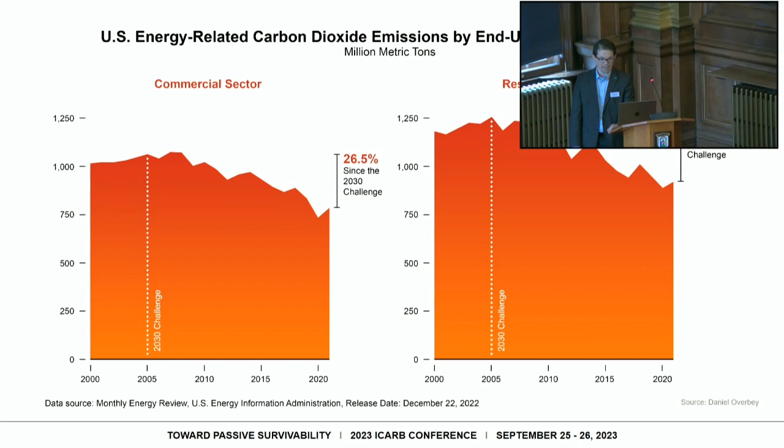How have we actually done in the States? On one hand, we've made significant cuts in both the commercial and residential sectors. But as you can see here, 26+%, it's not nearly staying on track as a collective industry. It's not deep enough, fast enough.

If we look at how the industry has done, the signatory firms that have signed up for the 2030 commitment, which is an initiative through the American Institute of Architects - this green line that you see on here, going back to 2010, when this initiative was brought forth to the architectural community - you can see what's essentially a flat line in the last 3 years.

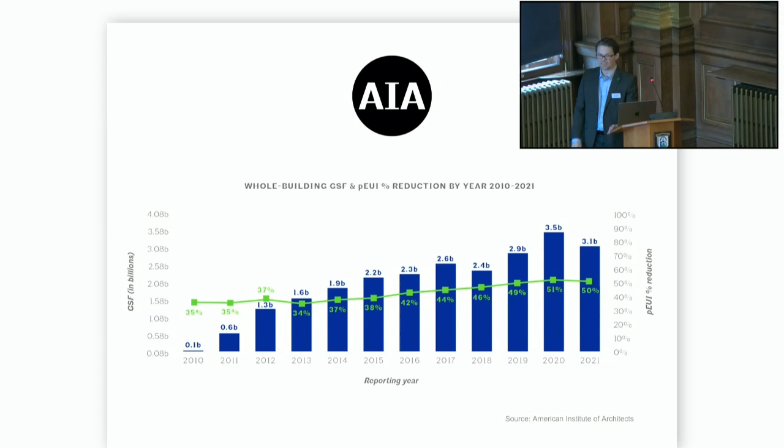You can't read that probably from your seats. That is 50%. What that means is in the last reporting cycle, we are just now, in the 2021 reporting of data, just now reaching the 50% reduction that Ed Mazria called for back in 2006. We've effectively flatlined. And this, by the way, represents the 1,000+ architecture firms that have raised their hand and said, we're going to do this and we're going to report data. This is the best of the best, and also only represents about 0.1% of the firms in the US overall.

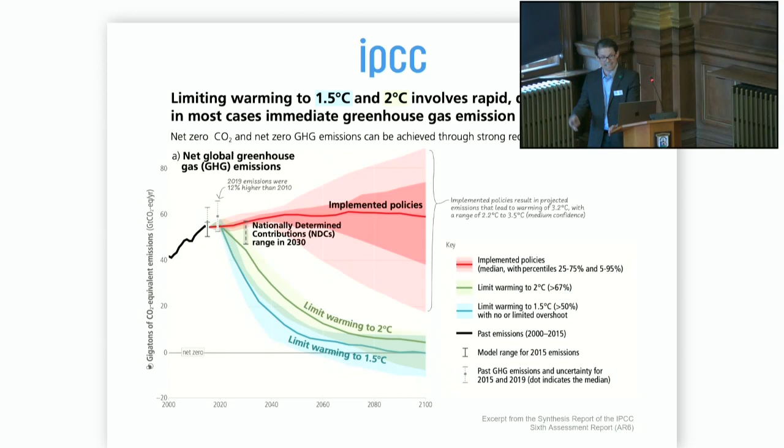So there has been and will continue to be consequences to the collective flatlining, and this is actually where Alex's story comes in. I've got the honor of sort of pinch hitting for him and telling you the story of his work in passive survivability, a concept that's been raised here in the last 2 days as well.

And that story with Alex goes back to Hurricane Katrina back in August of 2005, where thousands of residents were forced to evacuate their homes due to flooding, and moved many of them, 83,000, toward the Superdome, which is the largest dome structure in the US.

On the flight out here, I happened to watch an episode about the greatest stadiums, featuring Peyton Manning from Indiana, which is what drew me to it. It recounted the 10 greatest stadiums in the world of all time, and this was on the list, talking glowingly about what happened here.

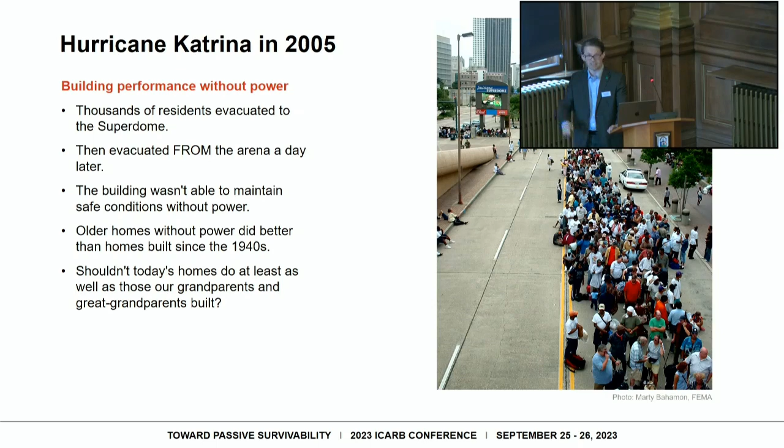Within a day, they had to evacuate people because thermally, in addition to some untoward behavior internally, temperatures reached a point that it was unsafe. So one day later, folks had to evacuate from this.

Alex and a group of 200 professionals, in an event sponsored by USGBC, assembled in Atlanta and put together a product that they used as a guide map for anticipating this phenomenon would continue to happen—the New Orleans Principles.

Within the New Orleans Principles is item number 8, passive survivability. This is the origin of that concept that Alex coined here, and you can see the verbatim language: homes, schools, public buildings, and neighborhoods should be designed and built or rebuilt to serve as livable refuges in the event of crisis or breakdown of energy, water, and sewer systems.

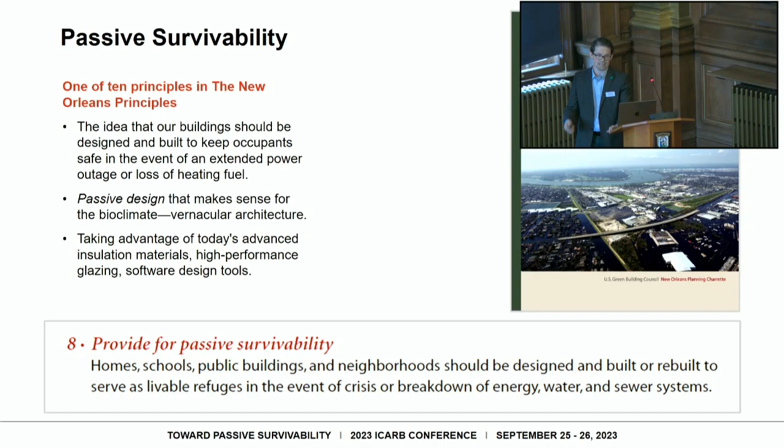That's the original definition. During Katrina, the acute threat was flooding, but we've learned that the chronic threat is thermal stress. This is something we see in headlines every day. You don't need to look far for it—it's in the mainstream media in the US, as I'm sure it is here.

We're inundated with these headlines every single day. The New York Times, this is—you can't see the gray in there, but basically looking at a spiked increase in deaths in the Pacific Northwest attributed to a summer heat wave that we had. Concerns over thermal stress have resulted in institutional guidance for passive survivability.

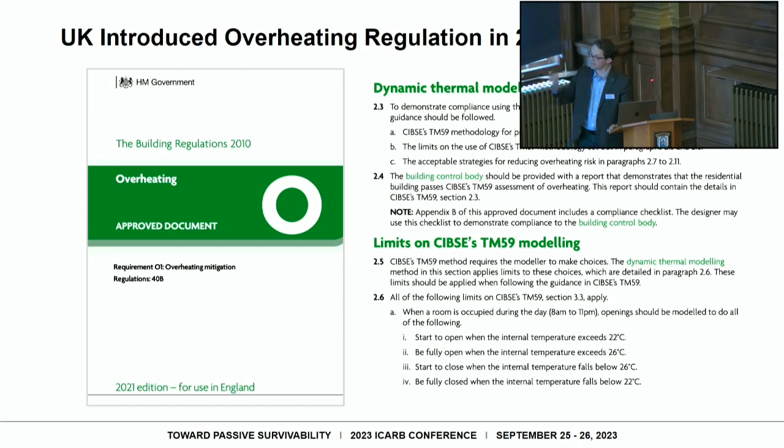This is not something especially new. That came out of 2010, but in New York City, passive survivability was addressed in some guidance documentation back in 2010. I'm aware too—Alex and I keep a database of the standards and guidance documents. The UK also in 2021 had some initial information.

I know I'm buzzing through this fast—101 slides, so if anyone wants this, I'm happy to share these slides afterwards. 2016 with Canada, New Zealand in 2017—there's a lot of them.

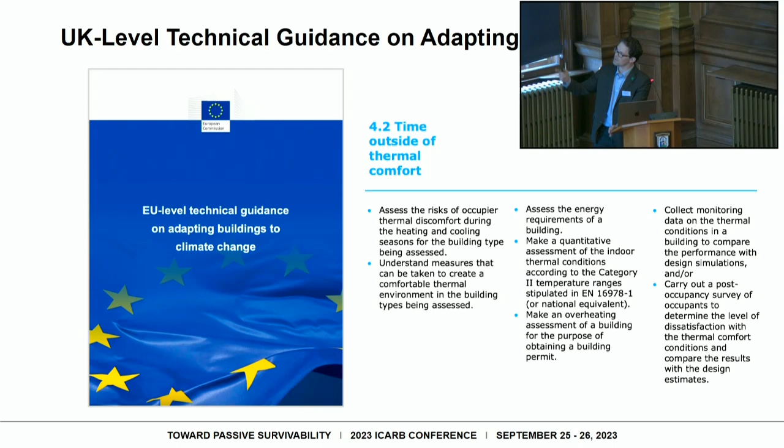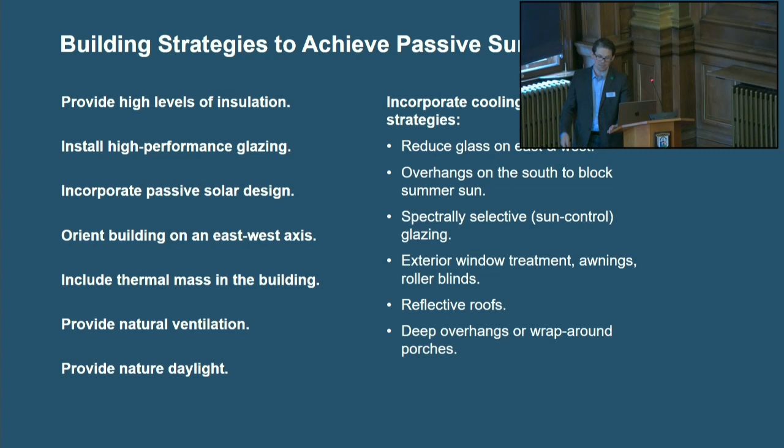Even some newly issued guidance this year, UK level technical guidance on how to adapt buildings to better meet passive survivability. And this is not magic, it's not new—it's about tapping into the natural energy flows of our sites and making sense of trying to reconcile concepts of resilience and passive survivability with sustainable design.

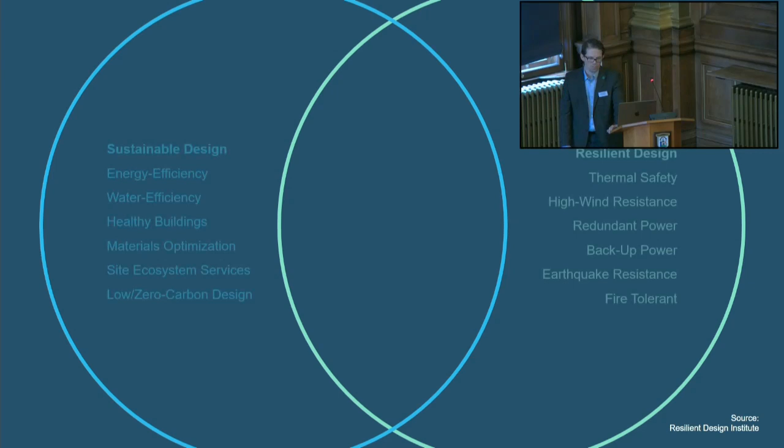That was the initial question posed to Alex and myself, asking: do they overlap? When we pursue net zero, we necessarily address both sustainable design and resilient design, but we've largely failed to achieve the basic levels of passive survivability.

Why? This is something we wanted to offer to our peers here today: 3 barriers to passive survivability, as Alex, his team at RDI, and collaborators such as myself have ascertained as the 3 primary barriers to why we don't see better performance with building stock with regard to passive survivability.

The first being the utilization of climate projection data. Today it's considered best practice to assess one's location looking at the macroclimate, looking at TMY, typical meteorological year data, to ascertain climate normals. You can see with the bars there at the bottom where those data sets are pulled from—TMY, 2, 3, etc.

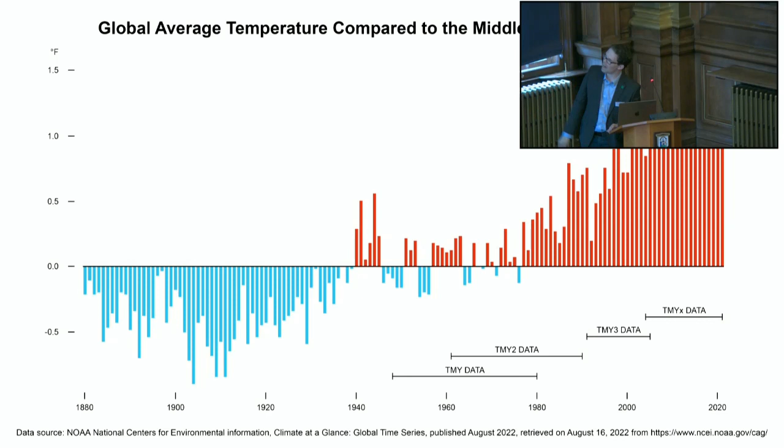And then you can see the average temperature differentials going back to the mid part of the last century. So you could take, for example, to put this into a different perspective, take the Windy City—take Chicago—which many might consider to be a predominantly cold weather climate. Oh good, the psychrometric chart.

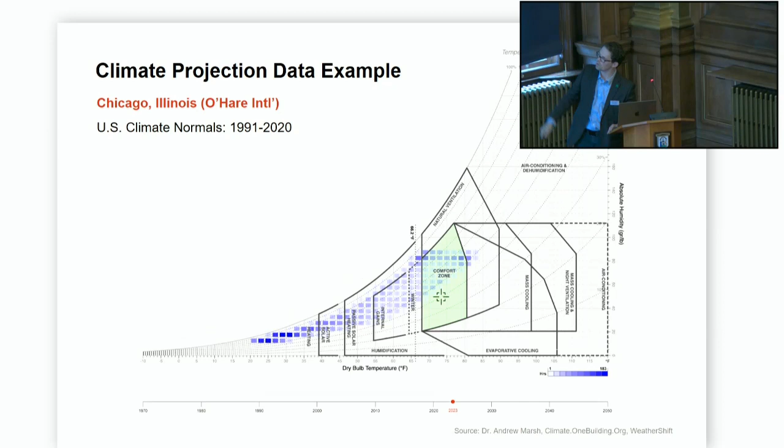I was worried with the gradient not showing up, you wouldn't be able to see this, but if I were to have my students right now design for Chicago, they may very well go to the Energy Plus weather file data, pull this long-term climate normals from 1991 to 2020, and this is what they're going to be designing with.

However, if we were to pull downscaled climate projection data with RCP 8.5 modeled in there, you can see the blue gradient. It gets a little fuzzy with the resolution of the screen, but that's not exactly what I would call a predominantly cold climate. Then this is not what they're designing toward.

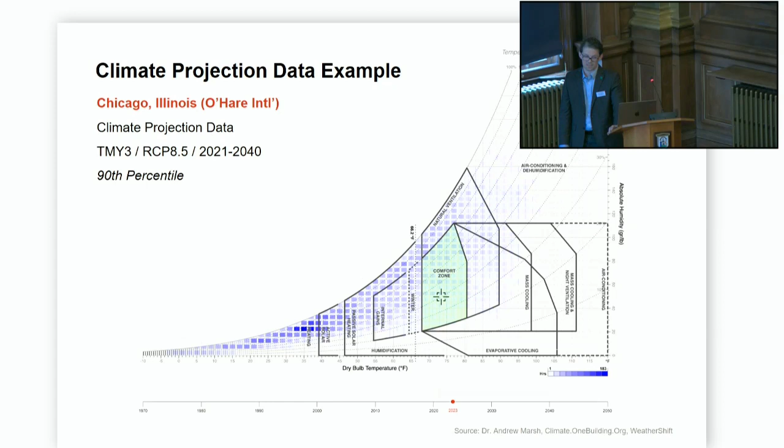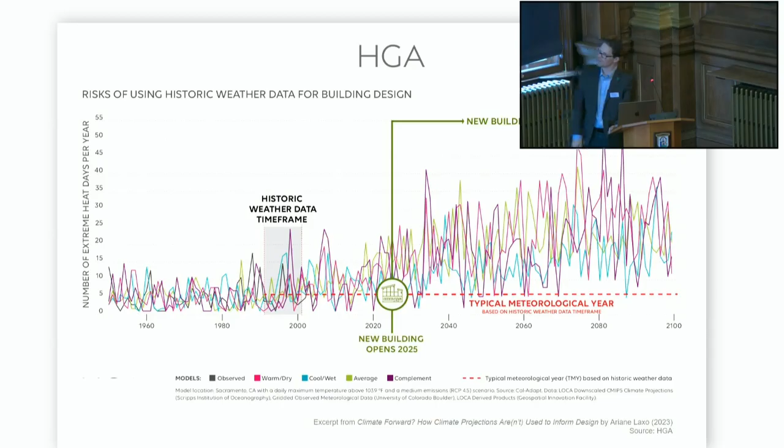You could take another great example from Boston, Massachusetts, where Alex and I have both given guest lectures and workshops on resilient design through the Boston Architectural College. In 2004, this project opened up—Boston's first ever LEED Platinum project. This is the Artists for Humanity headquarters. You're probably not aware of this nonprofit, but they serve underserved youth, giving them the ability to develop a skill set and an income stream, self-sufficiency, and they do a great service to the community there in Boston.

And the building is largely designed for passive ventilation. It was actually designed to take advantage of stratified air for cross ventilation, moving air through it.

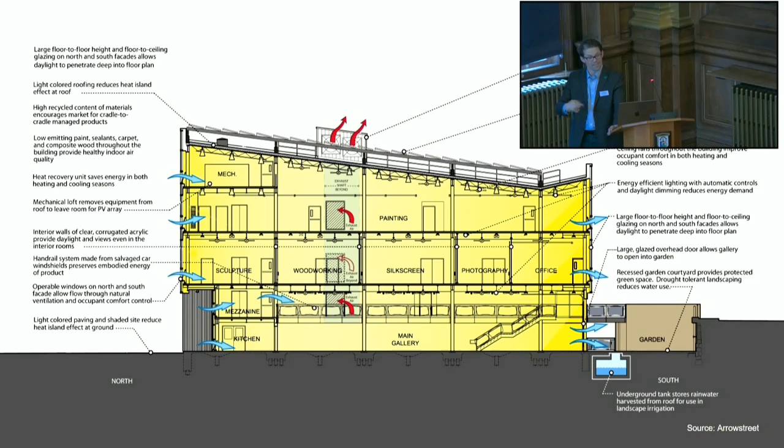What happened was about 10 years after this facility opened up, the facility management team started noticing that the project was not performing nearly as well as it was modeled to, or as it had been operating for the first several years. The reason for this failure is pretty evident—you can see the orange gradient there. At the point this project opened versus where we're going in the future, the average number of days above 90 degrees Fahrenheit is going to be all over the board, and with that increase, essentially rendering that passive system useless, which increases the operational cost and causes a burden for this charitable nonprofit.

So in order for building project teams to better access this information and start to use downscaled climate projection data, a few things need to happen. It's not so simple as just making it available in the market—there are some other barriers within this one item. It needs to be publicly available through professional or governmental institutions. It needs to be provided in a resolution, scale, and format that's actually suitable for building analysis. And it's got to adhere to some kind of standardized framework. There are lots of different approaches as to how you can actually create this data and bring it to market, and it needs to be codified and regulated.

This is something I brought up with a few folks talking yesterday: designers are just not going to use climate projection data otherwise. That second barrier is our collective failure in passive survivability. This is the part where Alex would tell you some of his work—I would call it a saga in the US market with regard to passive survivability, looking at a couple of different metrics. The first two I can buzz through pretty quickly.

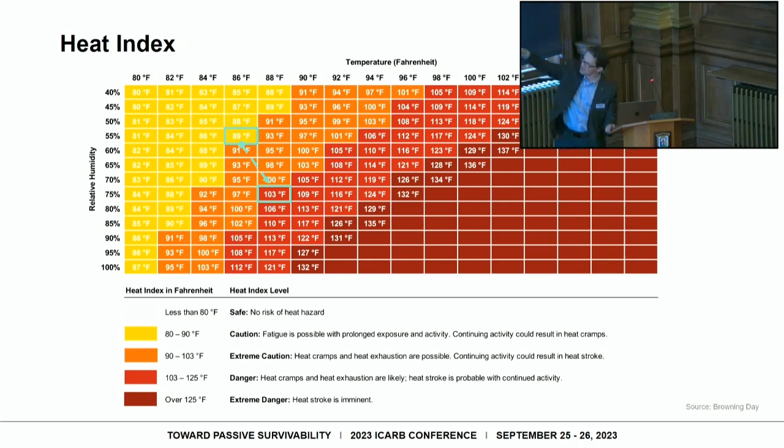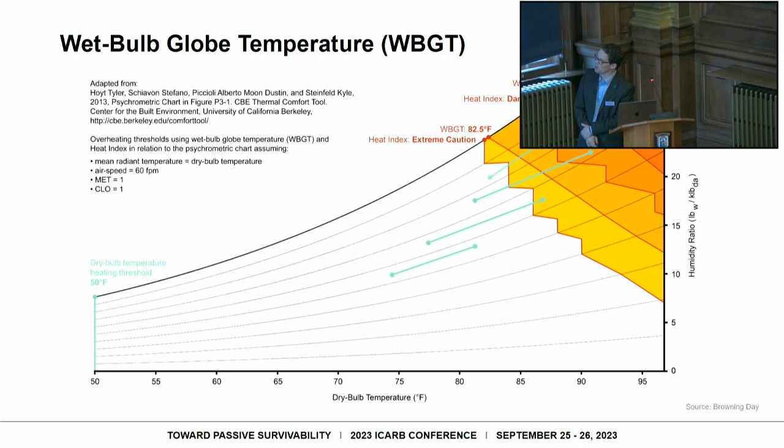Heat index—when the New York Times starts explaining heat index, you know it's getting pretty dicey out there. What's interesting about this is it cross-references sensible and latent heat, and with just a couple of degrees and about 20% difference in relative humidity, you go from a cautious to a dangerous scenario. You can also look at wet bulb globe temperature, an interesting metric used in some passive survivability standards, but both of these are designed for outdoor conditions—the latter even assuming activity happening—and it's unsuitable for indoor conditions.

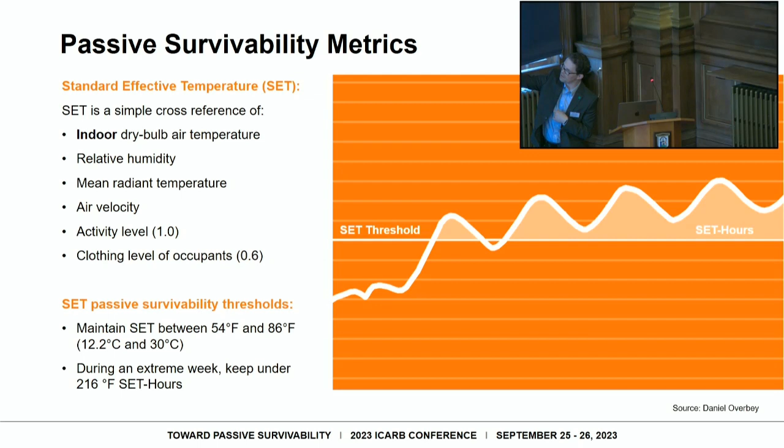So as was brought up by Eliza yesterday, standard effective temperature is what Alex and the team at RDI have been working on more heavily, developing this metric which is suitable for indoor conditions. It takes these other factors of human thermal comfort into consideration, and you can see the passive survivability comfort thresholds offered there. The idea is really simple: you take the worst 7-day stretch in any location—a long hot or long cold event—and look at what the degree hours are above or below those thresholds. You want to keep that number under 216.

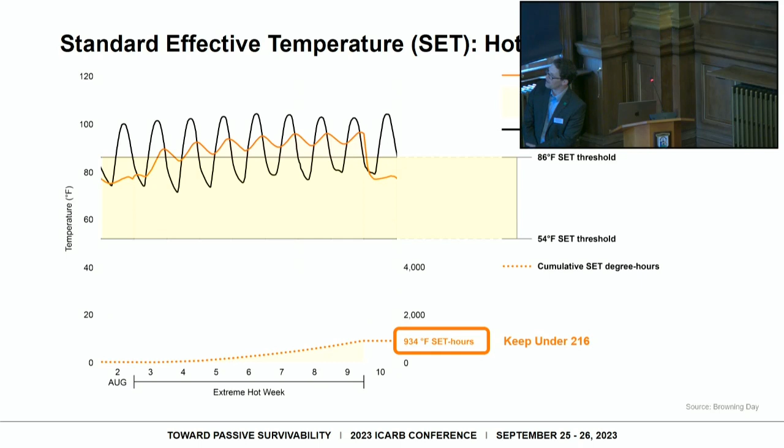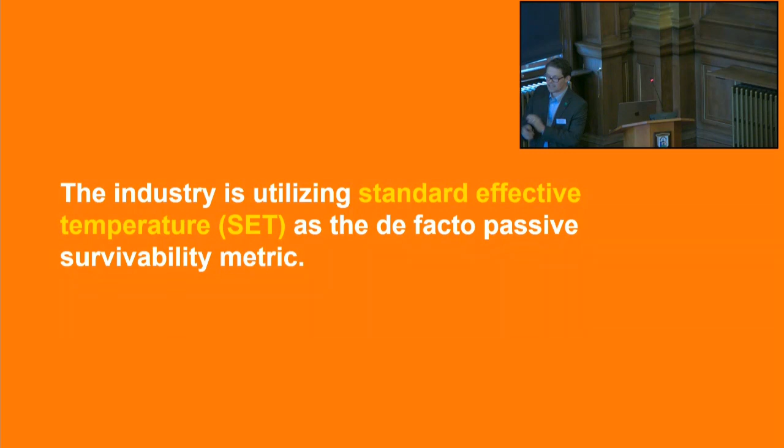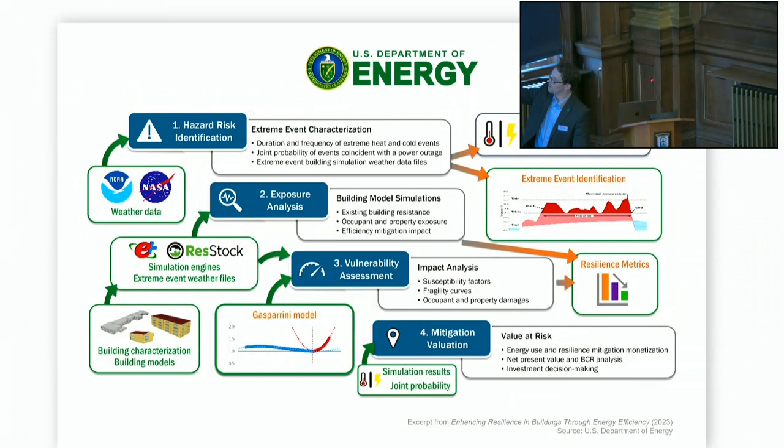This is an example from that data presented by NREL yesterday, and you can see in Houston you don't even get close. But interestingly, you look at that worst cold week, and you don't even get close there either. In fact, standard effective temperature has become the de facto metric used for passive survivability at this point, and was utilized by that same DOE report that NREL was working with. They went through that rigorous analysis that Eliza mentioned yesterday, so I can breeze through these slides, but again, they looked at 6 representative cities, and the data was pretty compelling.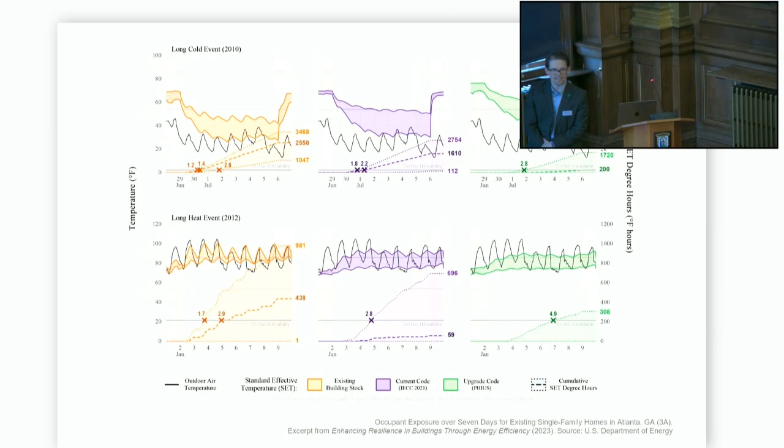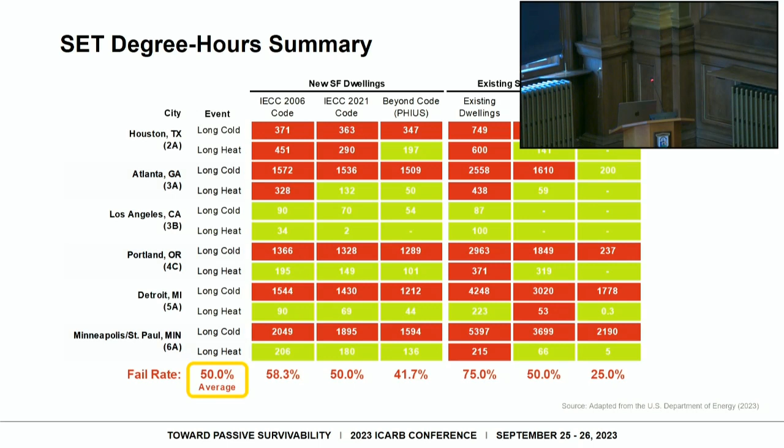You look at the SET degree hours during those worst case scenarios, and 50% of the total failed to meet passive survivability. What's even more interesting is a third of all PHIUS projects, which is the closest thing to a passive house we'll have in the US, also failed to get there. In other words, we cannot insulate our way to passive survivability.

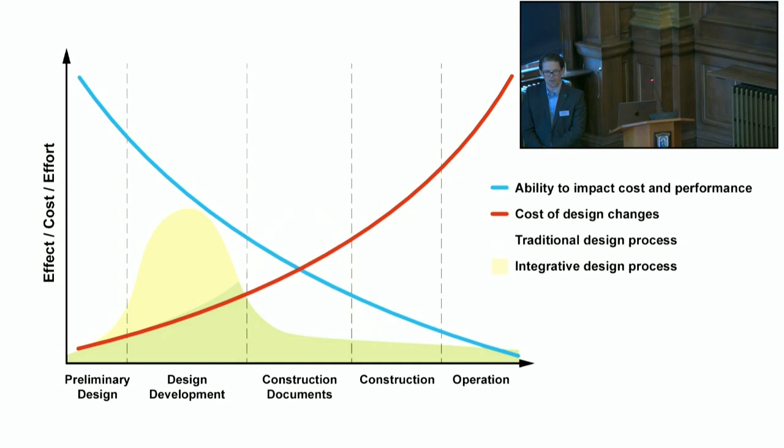We need tools available at the earliest stages of the design process. We once had this when I was going through grad school, doing some of my early research, and even in my early years in practice. You might recognize this - that's Ecotect, developed by Dr. Andrew Marsh out of Cardiff University.

Was that my buzzer? Okay, good, I still got time. Good, I'm just getting to the juicy part.

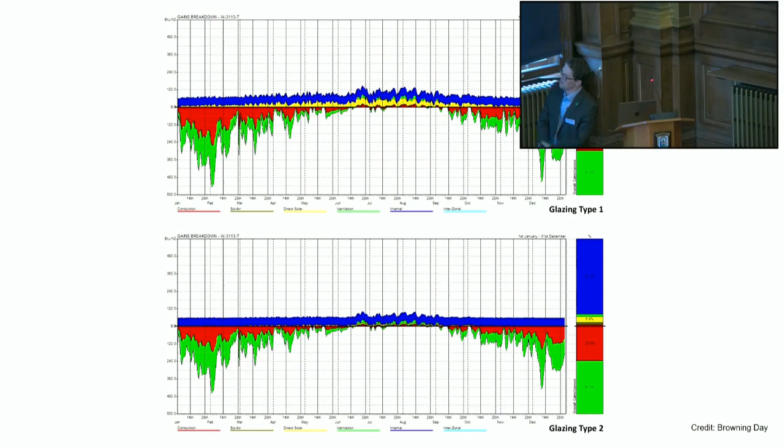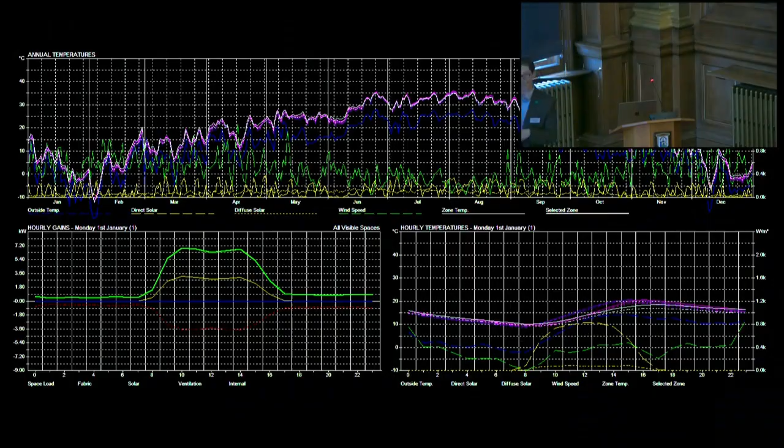So we can look at passive gains and loss analysis. We could look at passive systems. We could look at a sun path diagram and optimize. We could also look at whole building energy usage, and go through quick iterative models. You didn't have to be an Energy Plus grand wizard to access these tools.

75% of firms in the US have less than 10 people on staff. Many are far less than that, usually 2 or 3 people. You have to have these quick, accessible tools, and you need to be able to operate in HVAC-off mode.

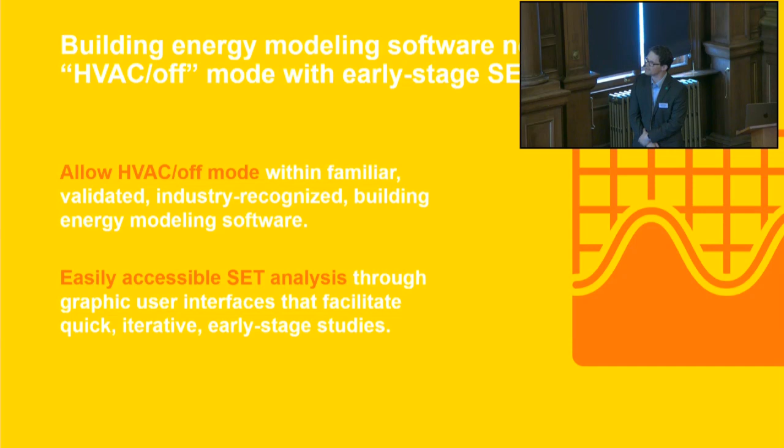A novel concept, and Sue brought this up: when these tools are funded by the mechanical industry, meeting thermal comfort standards developed by standards couched in the mechanical industry - not trying to name names, I could later - that's what you're going to be left with. So we need these accessible tools that allow an HVAC-off mode and easily accessible SET analysis.

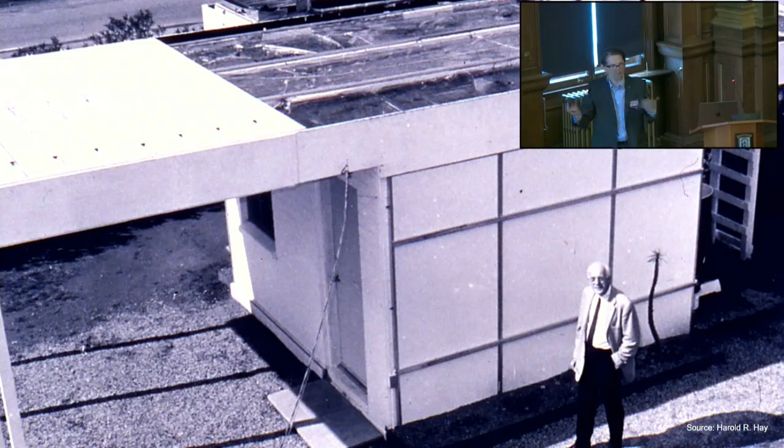Which brings me to the third and final unlock, which is passive systems. This is Harold R. Hay, who actually funded some of my early research at UNLV when I first met Sue, so this is kind of a full circle moment for me. Before Harold's passing, I had access to a tremendous amount of his data, some of which is probably not known to most in this room, except for maybe Bruce and Richard.

But he didn't let most of it see the light of day - if you knew Harold, you understand what I'm talking about. We're looking at his 1967 Phoenix prototype. That's the kind of flat line that we actually want - that's measured data from the first year of operation. He scaled it up, went to a Atascadero outside of UCLA, the first full-scale example of this roof pond system.

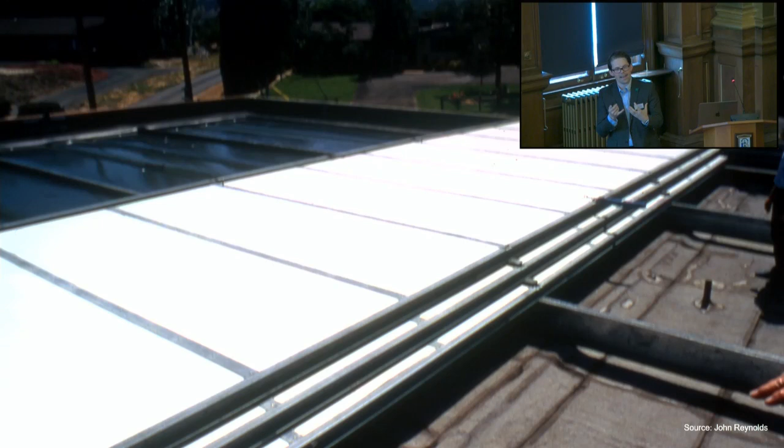Harold had this idea: let's take the substance that has the highest heat capacity of any naturally occurring matter on Earth, which is water, and use it as thermal storage. Even the LA Times tapped into this - there's another flat line. These are good flat lines to have.

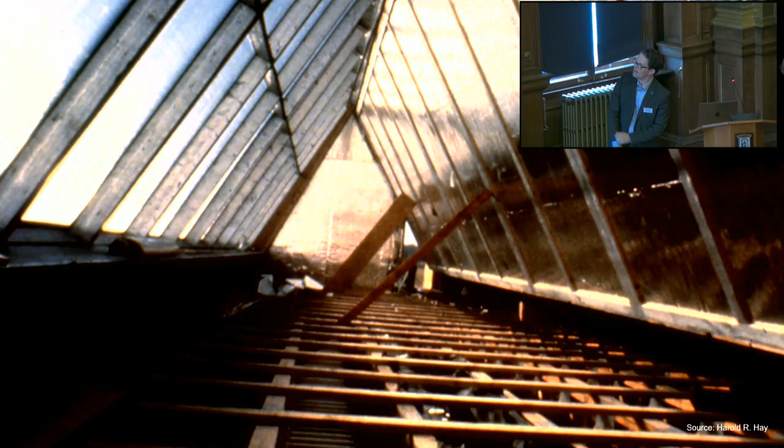And then Harold took it to St. Paul, a very cold weather climate, using a north application where they actually put it inside of an attic space, and it also performed well - so much so that it caught the attention of the Department of Energy, which ended up issuing a very detailed substantive report published in 1984.

This is a takeaway quote from the report: a well-designed roof pond can provide relatively even indoor temperatures year-round, when temperatures can vary between - I'll use the Fahrenheit they quoted - 32 degrees, which is freezing, and 115, which is like what you get in Phoenix.

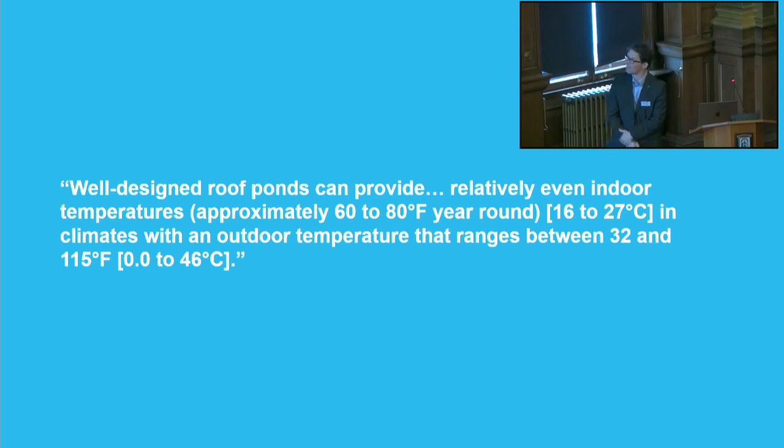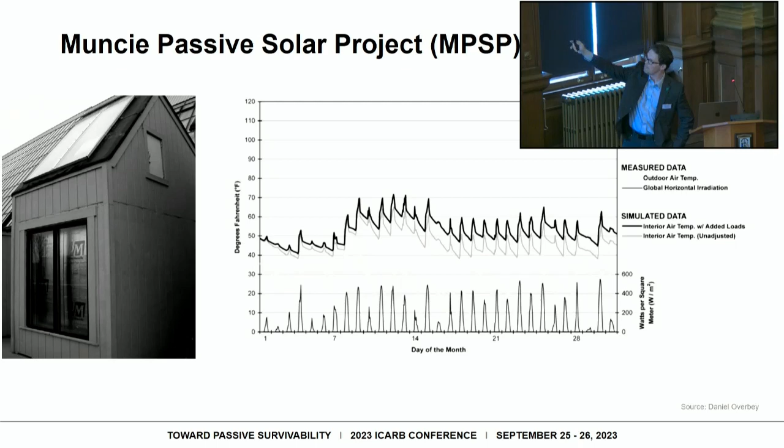We validated this with measured data in Muncie, Indiana, over 2.5 years. We took this information - there's a representative January example - and it stayed within the passive survivability thresholds with no mechanical systems, even when temperatures were far below freezing.

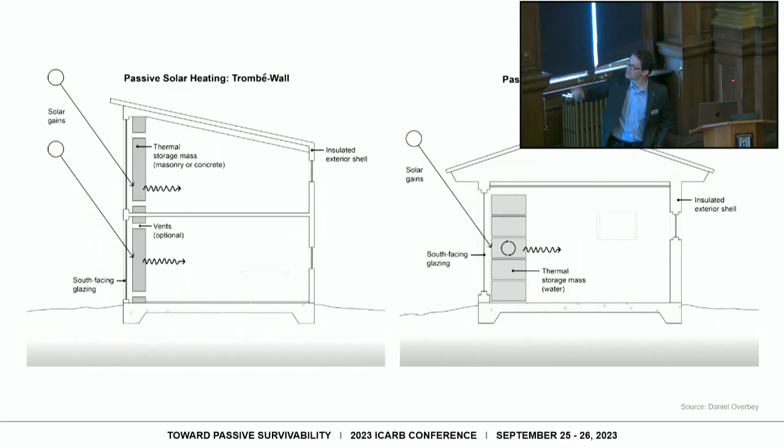We also looked at, you might recognize this, Los Alamos National Laboratory, Dr. Douglas Balcomb's work that happened in 1984, looking at direct gain, sun space, Trombe wall, and water wall, solar savings fraction, and the load collector ratio method. These systems work, and we validated it at UNLV with measured data over 2 years - it was within 5 percent of being accurate.

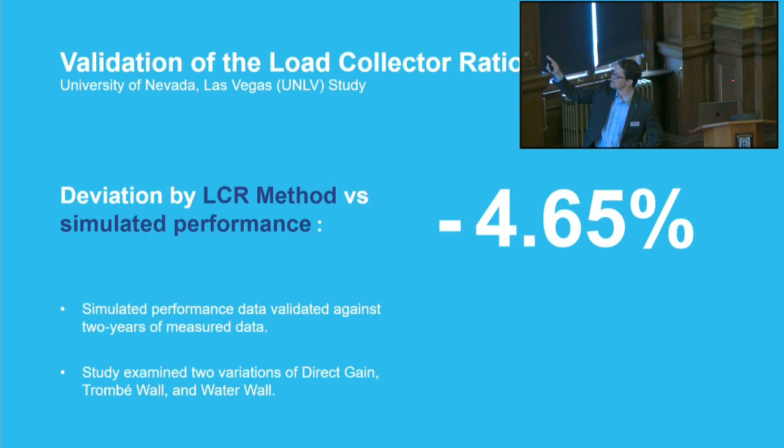There's no reason why we can't utilize passive systems. Again, you cannot insulate your way to passive survivability. We need these tools available to the market, and that's where we're going to operate in this nexus of net zero and passive survivability. And with that, there are the 3 critical needs again.